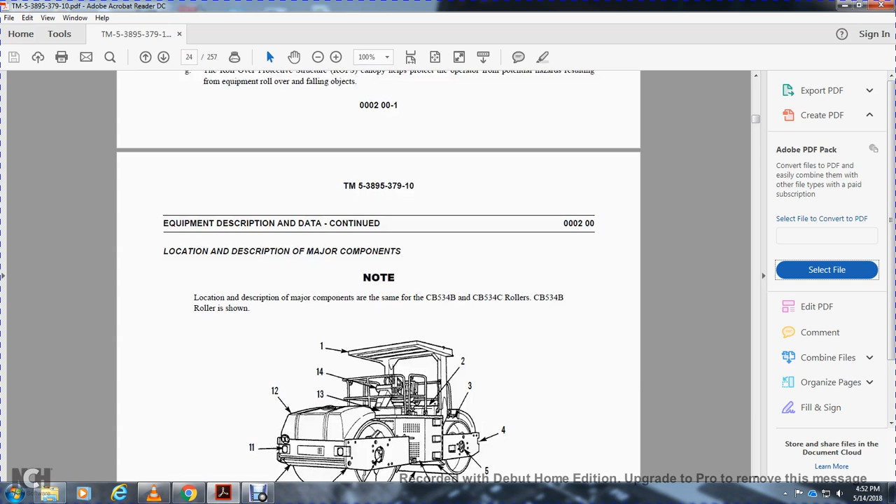Location and major components, location and description. Major components are the same for the CB534B and CB534C rollers.

CB534B is shown. 1 is your rollover protective structure. 2, the fuel and hydraulic tank. 3 is the water spray bars. 4 is your frame assembly. 5 is your vibrating motor. 6 is the scraper. 7 is the engine compartment.

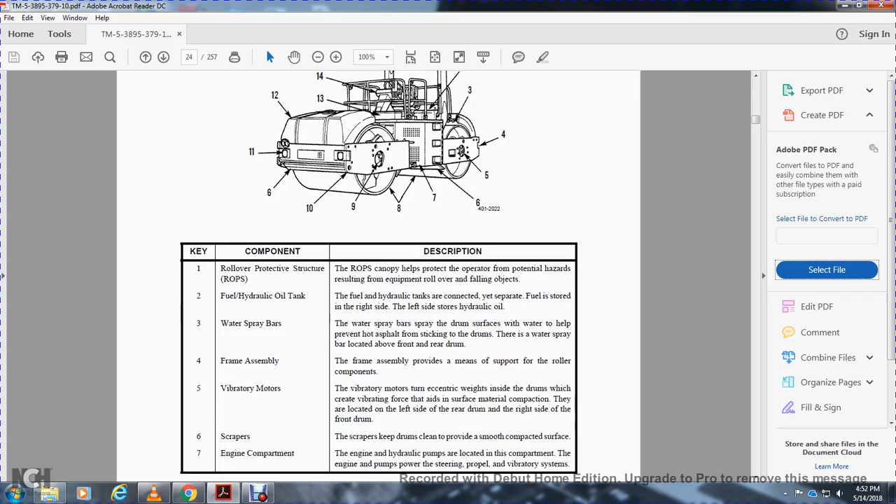8 is the drum. 9 is the propel motors. 10 is the yoke assembly. 11 is the work lights. 12 is the water tank. 13 is the toolbox and 14 is the operator station.

Your rollover protective structure. The rollover protective structure canopy helps protect the operator from the potential hazard resulting from equipment rollover or falling objects.

Fuel and hydraulic oil tank. Fuel and hydraulic tanks are connected yet separate. Fuel is stored on the right side, and hydraulic oil on the left side.

Water spray bar. The water spray bar wets the drum surface - the water helps prevent hot asphalt from sticking to the drum. The water spray bars are located above the front and rear of the drum.

Frame assembly. The frame assembly provides the means of support for the roller components.

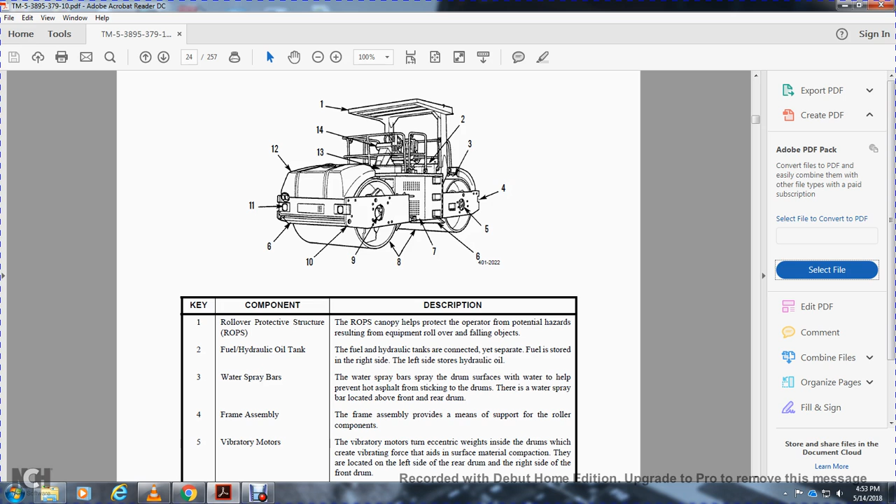Vibrator. The vibrator motor turns the eccentric weight inside the drum, creating vibrating force that aids surface material compaction. They are located on the left side of the rear drum and the right side of the front drum.

Scrapers. Scrapers keep the drums clean to provide a smooth, compact surface. Engine compartment - the engine and hydraulic pumps are located in the compartment.

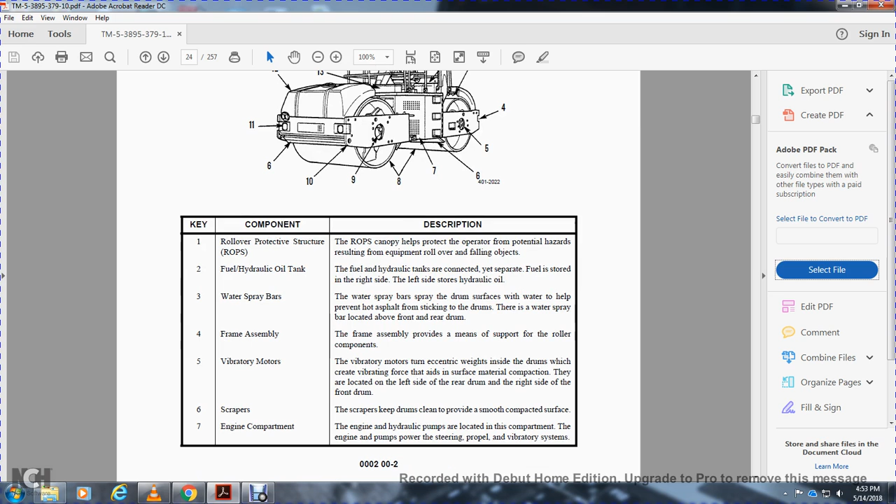The engine powers the pumps for steering and propelling, and the vibrator system. Drum - the drums provide a smooth surface for surface material compaction.

Propel motor. The propel motor provides power to the drums to move the roller. They are located on the right side of the rear drum and the left side of the front drum.

Yoke assembly. The yoke assembly provides support, pivoting the front drum to the frame assembly for steering.

Work lights. The work lights provide light for use in poor visibility situations, located at the front and rear of the roller. Water tank.

The water tanks hold the water delivered to the drums, feeding the water to the spray nozzles on the spray bars. The water tank is mounted above each drum.

The toolbox. The toolbox holds the tools the operator needs to do authorized maintenance.

Operator station pivot console. It may move 90 degrees left to right, increasing visibility. The gauges and controls move with the console for easy operation.

The difference between models - throttle: CB534B is mechanically controlled by cable, CB534C uses an electrical toggle switch with high and low settings. Speedometer: CB534B, no. CB534C, yes.

Starting aid: CB534B uses a water heater jacket, CB534C uses an air inlet heater. Handrails are a different design between the two but serve the same function, just with a different look.

Type: roller, motorized vibrating tandem steel drum. Model: Caterpillar CB534B and CB534C rollers. Length specifications follow.

CB534B length is 203 inches, CB534C length is 195 inches. Height is 118 inches, width is 73 inches. Height at the steering wheel is 95 inches.

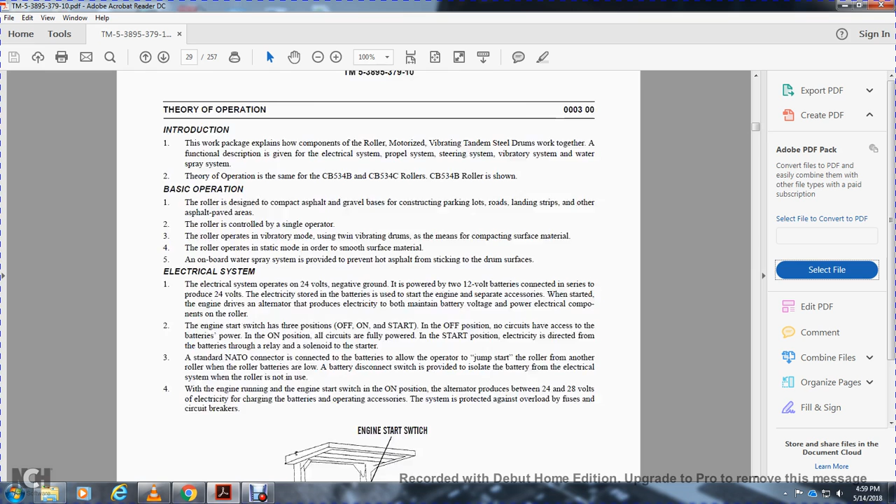A battery disconnect is provided to isolate the battery from the electrical system when the roller is not in use. When the engine is running and the engine start switch is in the on position, the alternator produces 24 to 28 volts to charge the batteries. Operating accessories with the system are protected against overload by fuses and circuit breakers. This shows the engine start switch, batteries, NATO connector, battery disconnect switch, starter, and alternator.

Propel system. When the propel control lever is pushed forward, the roller moves forward. When the propel control lever is pulled backward, the roller goes in reverse. The propel control lever controls the flow of pressurized hydraulic oil to the propel motors.

Propel motors. The hydraulic propel motor is located on the left front of the drum and the rear of the right drum. The terminal propel gearbox turns the roller drum. Propel speed is controlled with a toggle switch, allowing operation in high speed range, the hare, and low speed range, the tortoise.

A shifting solenoid is activated, changing the flow rate of hydraulic oil to the propel gearbox. Inside each propel gearbox is a brake that automatically engages when there is no hydraulic pressure; hydraulic pressure results from activation of the propel system in forward and reverse.

When the roller needs to be moved while the engine is not running. A manual brake release pump can be used to release the brakes, and the brake neutral start relay prevents movement of the roller during the starting procedure.

The power for the propel system comes from the 4-cylinder turbocharged diesel engine mounted in the center of the roller. The engine is attached to a propel hydraulic pump, which provides pressurized hydraulic oil to the propel system.

The fuel and hydraulic tank system consists of the hydraulic tank located on the left side and the fuel tank located on the right side. Although the tanks are welded together, they are separate in function. The CB534B hydraulic oil tank holds 15.5 gallons, 59 liters of hydraulic oil. The CB534C hydraulic tank holds 24 gallons, 91 liters of hydraulic oil. The fuel tank holds 55 gallons of diesel or JP-8 fuel to supply the engine.

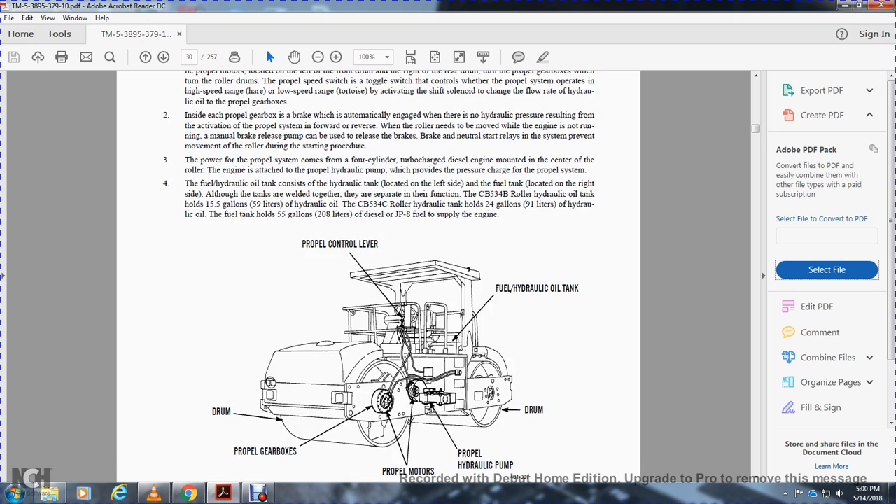The two hydraulic steering cylinders provide the motive force to steer the roller, with the articulating yoke of the frame over the roller changing the path of travel. The steering wheel controls the direction of travel.

The hydraulic steering is actuated by the steering control valve, directing pressurized hydraulic oil to the hydraulic steering cylinders. The steering system's hydraulic pump has two functions: primarily providing pressurized hydraulic flow to the steering roller.

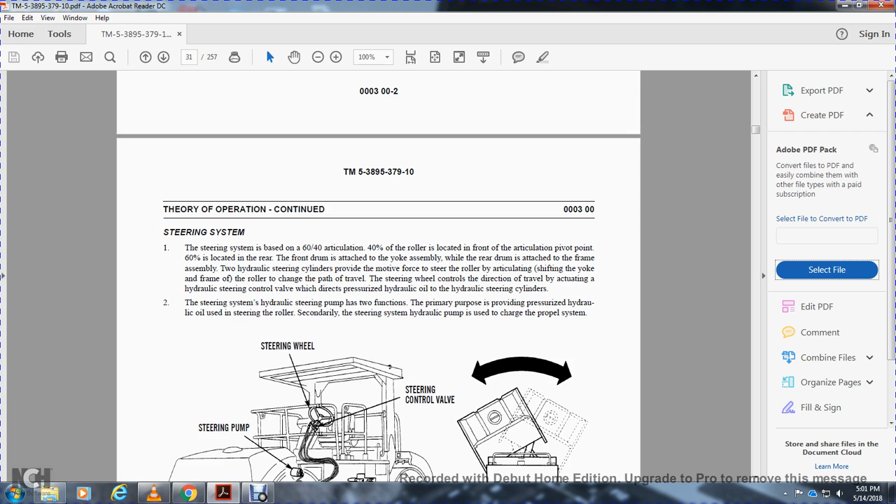Secondly, the hydraulic pump unit charges the propelling system. This shows the steering wheel, steering pump, yoke assembly, steering cylinders, frame assembly, steering control, and the left and right pivot.

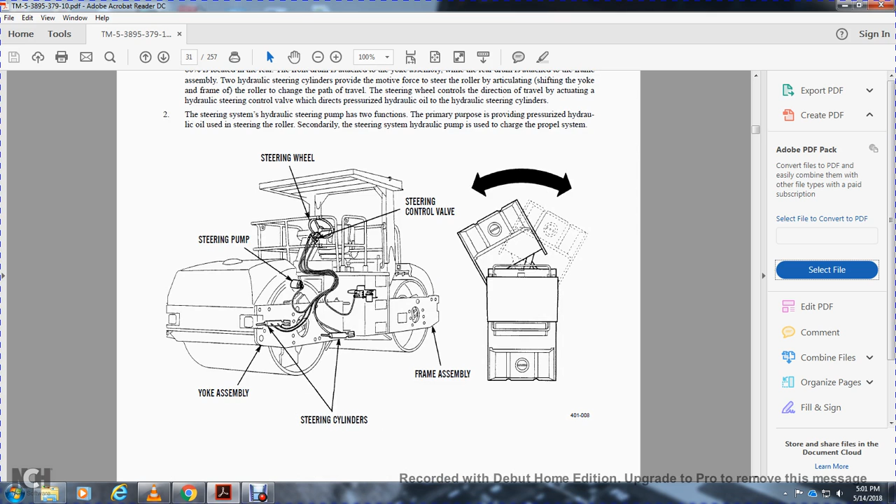The vibrator system: the hydraulic vibrator motor is located to the left of the front drum and the right of the rear drum. The eccentric weight is located inside each drum.

As the eccentric weight spins, kinetic energy creates the force that causes the drum to vibrate, which intensifies the roller's compaction of the surface material.

The eccentric weight chamber is filled with steel shot, with the weight attachment on one side inside the chamber.

This is high amplitude. As the weight turns in the other direction. The baffle collects the steel shot on the opposite side of the weight, producing a rotational imbalance causing less vibration, or low amplitude.

Each drum is isolated from the rest of the roller by 24 rubber isolation blocks. These isolation blocks allow the operator to remain relatively comfortable while the drum is fully vibrating.

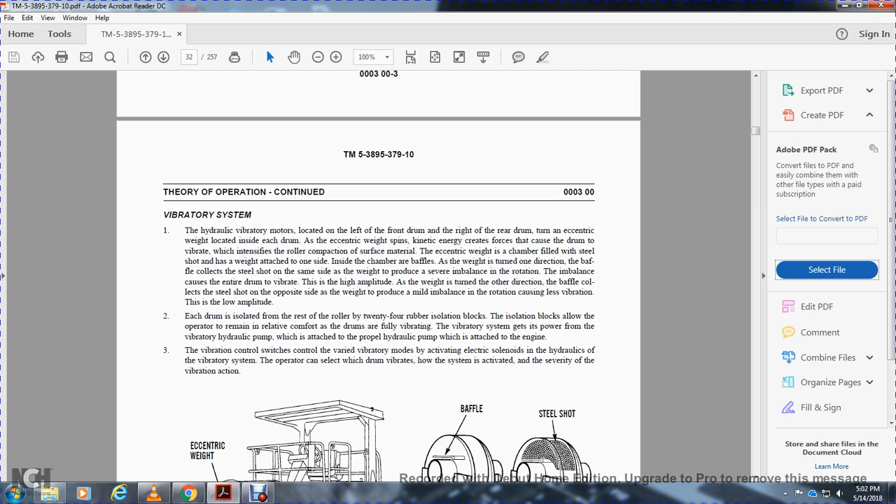Operators can select how the drum vibrates and the severity of the vibration action. This shows the hydraulic vibrator motor, eccentric weight, and isolation blocks.

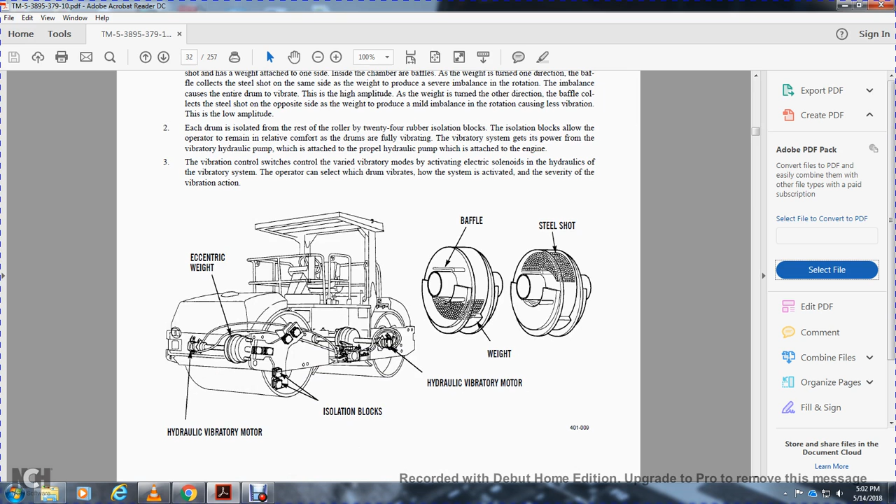The baffle and steel shot weight are shown. Your water spray system is used to wet the front and rear drums to help prevent hot asphalt from sticking to the drum surface during compaction.

The water system consists of two identical but separate systems, so that each supplies water independently. The operator's console controls the water flow with a switch in three positions: off, continuous spray, and intermittent spray.

The continuous spray setting sprays water on the drum continuously. The intermittent spray switches on a 15-second cycle, with water spraying on the drum and then no water spraying, to reduce water consumption.

There are three drain cocks that allow water to be drained from the system. The pump pulls water from the tank through a water spray screen, which filters foreign material from the water before it enters the pump and spray bar.

There are seven spray nozzles on each spray bar that distribute water evenly over the drum surface. A check valve is located at the end of the spray bar to hold control pressure for the water in the spray bar, with excess water passing back through the check valve into the water tank.

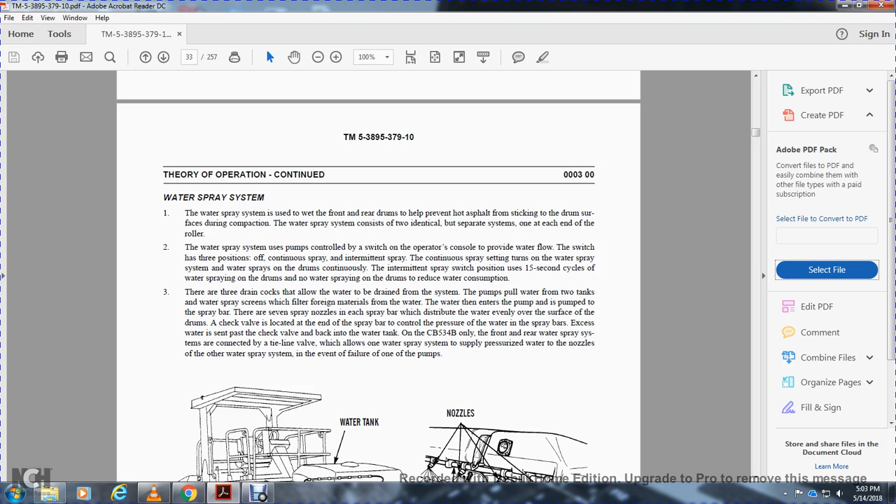On the CB534B only, the front and rear water spray systems are connected by a tie-line valve, which allows one water sprayer to supply pressurized water to the other water spray system in the event of a pump failure.

This shows the tie line, the drain valve, the pump, the strainer, the drain valve, the spray bar, the water tank, and the nozzle spray bars.

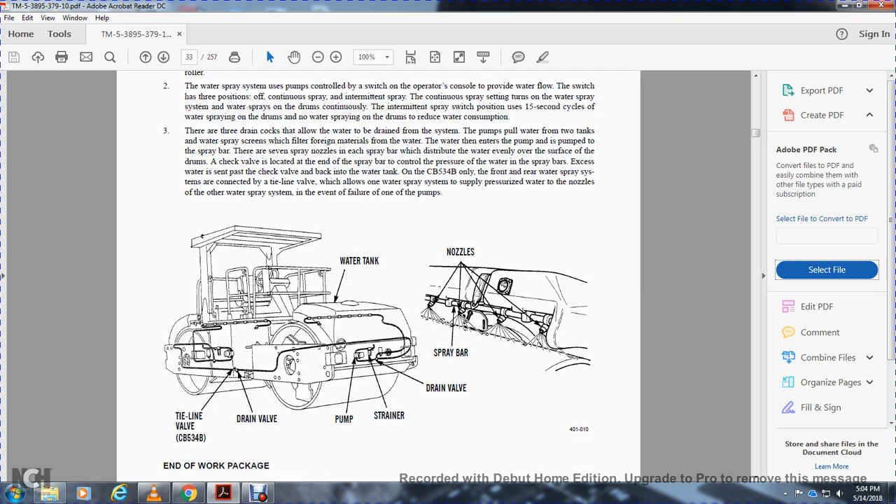Chapter 2, Operating Instructions.